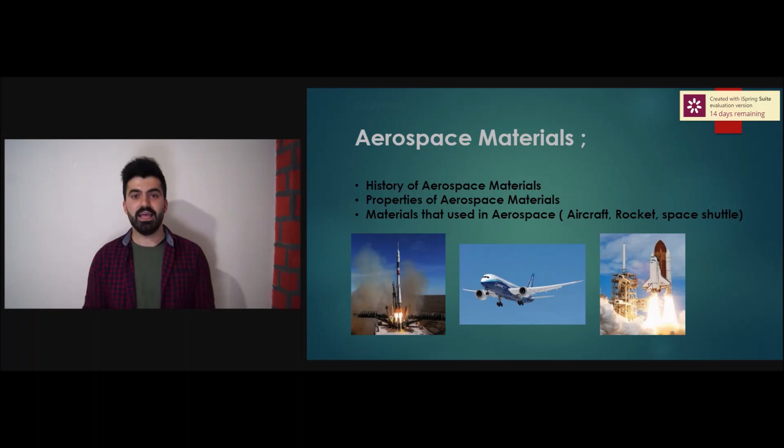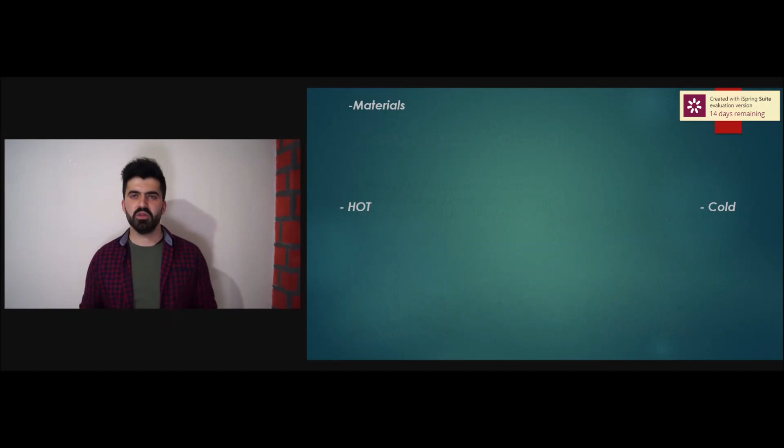But first, for aerospace vehicles we need materials or composites that can resist different weather conditions and different circumstances. For example, as you can see in the slides, we need materials that can resist heat, because in the combustion of rocket and aircraft engines the heat can reach up to 2000 to 3000 Celsius, so we need a material that can resist that heat.

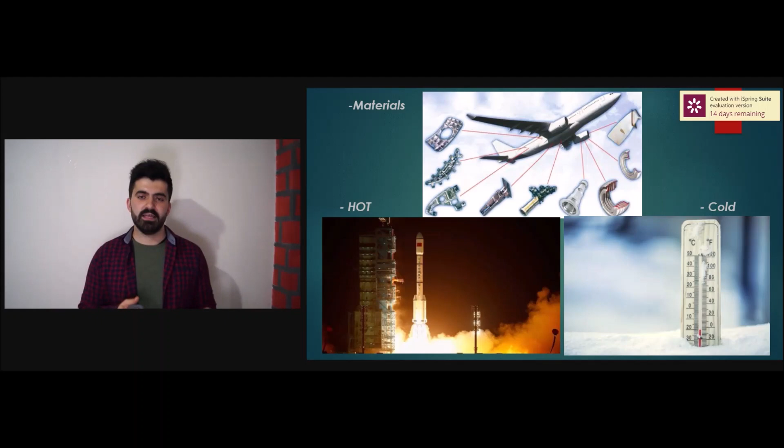Before starting my presentation with the history of aerospace materials, as I said before, we need materials for resistance. I want to say something about the sword. As you know, a sword is made of metal, but when we heat this metal up, it can be melted. It's that simple: we need a material for aerospace vehicles that cannot be melted, so that it can resist in all conditions. So right now let's start my presentation with history.

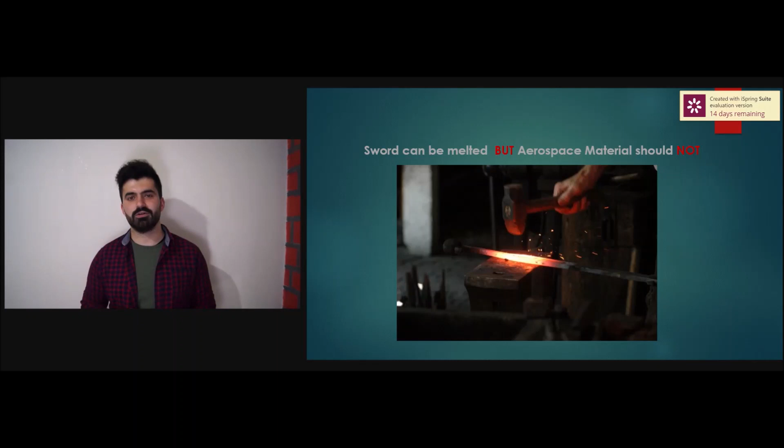First, the history of aerospace materials. For the Wright brothers, the selection of materials for the period 1903 till 1930 was according to maximum strength and minimum weight. To make an airframe for the aircraft, they realized they needed maximum strength and minimum weight, so the properties they needed were stiffness, toughness, and durability. The main goal was that the weight must be minimized, because the aircraft was not that powerful. It was just like 150 horsepower, so it could not carry too much weight.

Because of that, the early airframes constructed for aircraft were entirely wood, completely made of wood, because lightweight, stiffness, and strength were needed. Wood was plentiful and inexpensive, and its properties were well understood at that time, because mostly everyone was using it in buildings, bridges, and construction. That's why wood was used, because it was the main material, or the main element, used in that period.

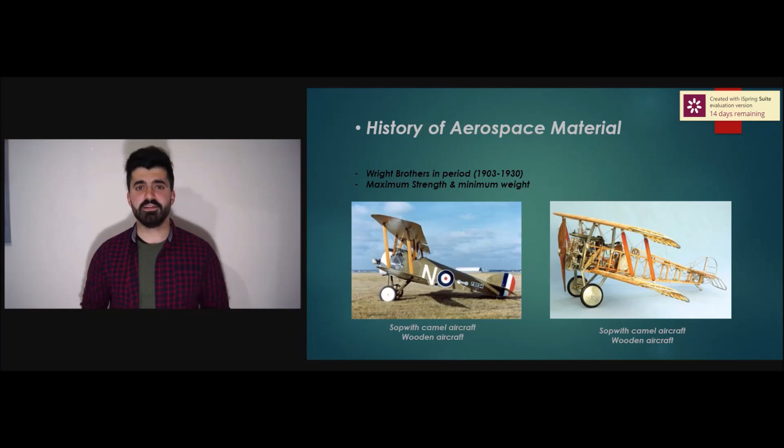Now we will go through the next subject. Secondly, let's talk about the properties that help us choose the suitable material. Several properties are needed to make the best material for aerospace. The first property is stiffness, which explains how rigid it is, how much it can be bent. The second property is toughness. It is the ability to absorb energy and plastically deform without fracturing, or we can say the amount of energy per unit volume. The third property is resistance to corrosion.

Resistance to corrosion refers to how well the substance can withstand damage caused by oxidation or chemical reactions. The fourth property is fatigue, which is the weakening of the material caused by repeatedly applied load. And the final and most important property for aerospace material is cost: high quality at the least cost is needed to have a suitable material.

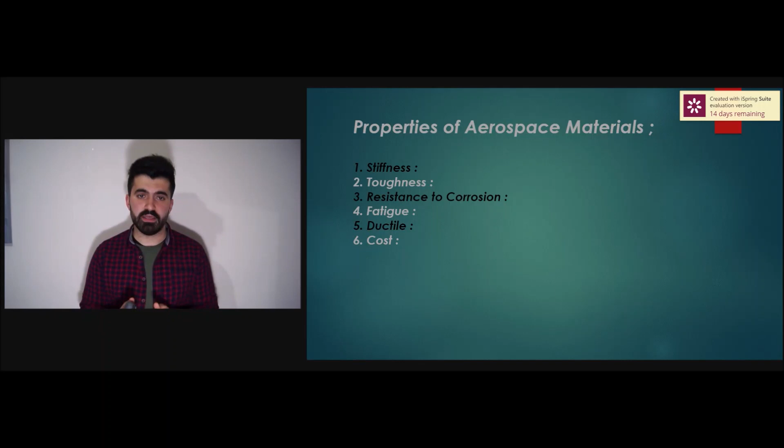Another property of aerospace material, which we missed, is ductility. Ductility is a measure of a metal's ability to withstand tensile stress, or in simple words, the forces that pull from both ends of the material.